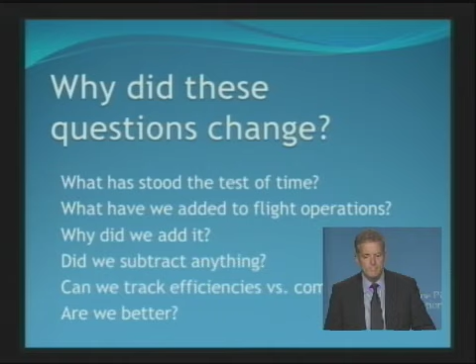Yeah, I think we subtracted something. I think we subtracted a thing in basic pilot skills. This Saturday I should go for my B-25 type rating, and that airplane, it takes 5 fingers to start the engines. But we don't want anybody to have to watch the color of the flame to adjust the mixture of an engine anymore. That's not a very good idea.

Very interesting question: can we track efficiencies versus complexities? We can always make things more complex, but would we actually make it any more efficient? Are we better? Are we better?

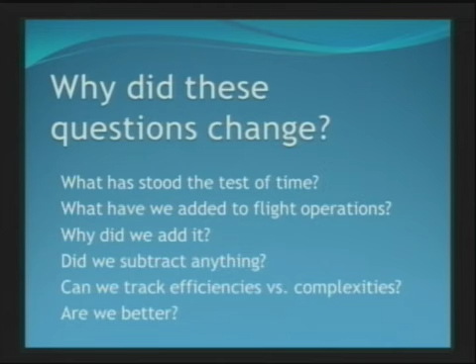When Alan was president of the Boeing company, he had a meeting with us - this is the original 20 people that made the 777 program. We're sitting around this meeting in his office, and he said your mission is to make a safe and efficient global air transportation system, to be a key participant in a safe and efficient global air transportation system. Our collective mission, from the designers to the controllers to the security people, the maintenance people, to the people that operate the airplane, has never changed.

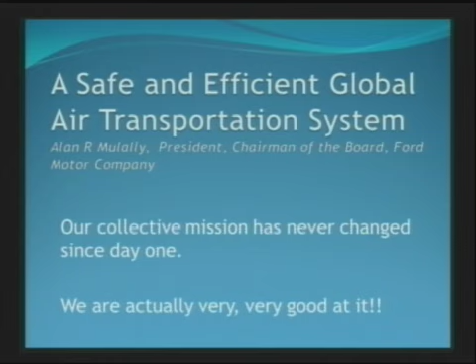It is absolutely, unequivocally about safety. If we ever lose the safety, the theory that we not have a safe flight, we're all out of business. Nobody will get on our jets, no matter how wonderful the coffee service is or the TSA is. And as Dave said it very eloquently, better than I can say, we're actually very, very good at it. I ran through the statistics of the predictions in 1990, and we are bettering the requirements of the safety event analysis of 1990, as the rates of flights go up. So we're actually better than what we hoped to do, right?

But we know we have to keep getting better because the future is out there. When Dave asked me about coming to talk about this, this was the first set of impressions I had.

He says, why don't you talk about the future of aviation and technology and what are you going to do? And I drew a big blank. But I kept thinking, airplane changes in the last 40 years. So anybody got 727 time? Maybe probably as flight engineers if you're still around anymore.

The 737 autopilot, autoflight had a heading hold, altitude hold, and VOR track. That was all it had. Flight director wasn't coupled to the autopilot. No auto throttle system, no manually tune all the frequencies, distributed caution and warning systems in the overhead panel, manual systems control. And then for your oral exam, you could legitimately draw the system on the chalkboard.

The 787, 777-300 auto-flight guidance. On the 787, from hitting the toga button on the takeoff roll to coming to stop at the end of the runway, we will provide you left-right guidance. Once you get airborne, we'll provide you up-down guidance. We'll provide you indication of deviation from the path, and warning of excessive deviation, from the toga push until the end of the rollout.

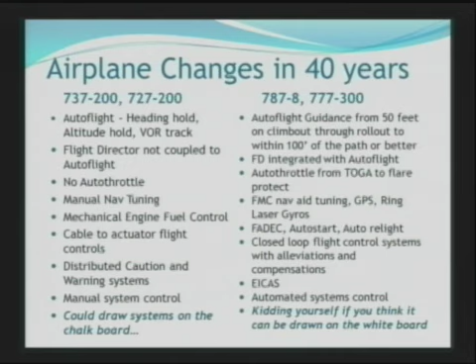Closed loop flight control systems with alleviations and compensations, my favorite part of it. EICAS systems, automated systems controls—if you ever looked inside a 787 or a 777 and you think what you drew on your oral was really in the airplane, you're dreaming. You're flat dreaming. And it goes into the concept that Dave spoke about earlier, the fact that we are systems. The airplane, the whole thing is a system. The people, the pilot, and the airplane make a system.

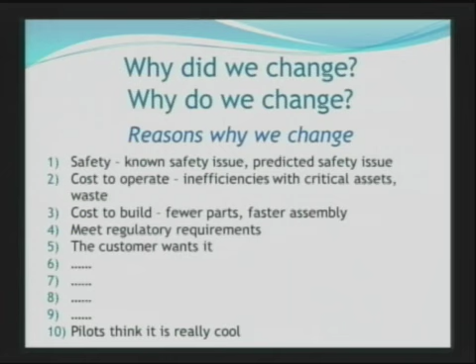Why do we change? Why do we change? Safety, right? Cost to operate, cost to build, meet regulatory requirements like the next gen. The customer wants it. There's probably four more in there, and then the last one—this is one I have to deal with all the time—the pilots think it's really cool. So all those people that want their iPad holders installed on the yoke, skip it.

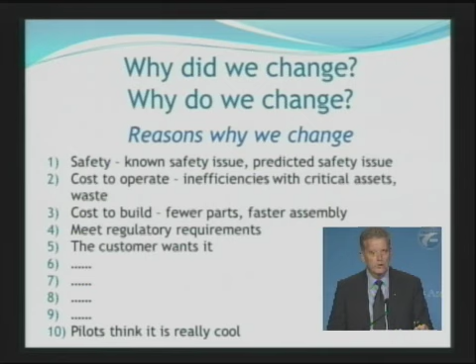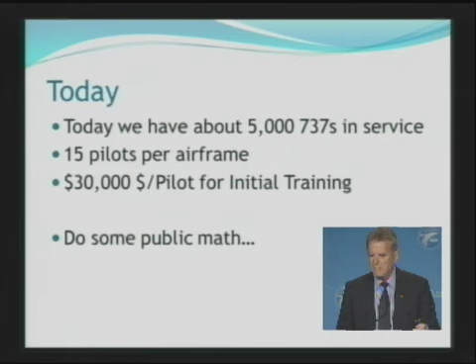We have embedded infrastructure. We have 5,000 737s in service, just the numbers. 15 pilots per airplane, $30,000 estimated cost for training. Do some public math: $2.25 billion in capital invested into flight crews around the world.

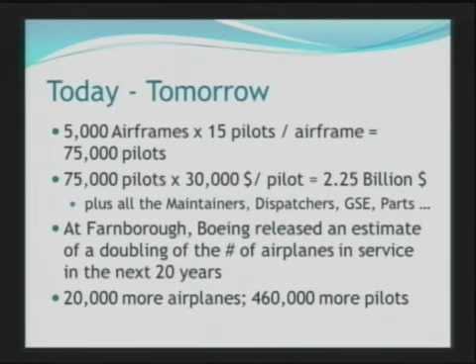At Farnborough, Boeing said that we think the airline service is going to require 460,000 more pilots in the next 20 years. As far as I can figure out, that exceeds the capacity of the training system today. So unless you know of a really killer application, the competitive race for us right now is to get 787s out the door, get 777s out the door, get the 737 MAX out the door, and get it into our customers' hands.

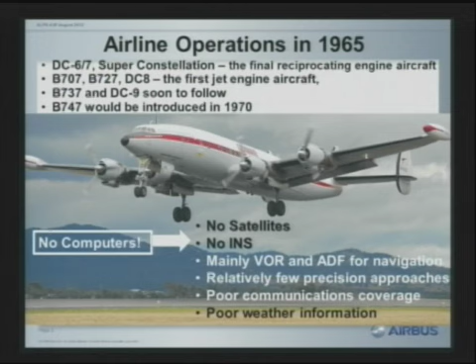The role of the pilot in 1965 was to aviate, navigate, and communicate, with the help of a flight engineer to manage the systems. The flying task was essentially an extensive manual skill set, and the mental skill set required was focused mainly on instrument flying.

It required of the pilot a solid knowledge of the atmosphere and weather, basic aerodynamics, and airfield capability. By airfield capability, I mean: on a given runway, at a given weight, can I get off this runway with the required performance, both from a climb standpoint and an accelerate-stop standpoint? And in the landing case, can I land on that runway given the weather conditions, the runway condition, the runway length, where I want to turn off, etc.

So those basic required skill sets - knowledge of the atmosphere and weather, basic aerodynamics, and airfield capability - are what the pilot really needed to know in 1965. Let's have a look today and see what skills are required.

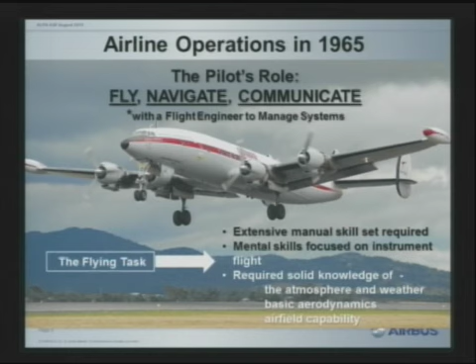Airline operations in 2012: the A320 and the 777 were the first fly-by-wire airplanes, and they've been in service now for almost 20 years. Almost all the airplanes flying today have glass cockpits with LCD displays, and routine overwater operations are now conducted with twin-engine airplanes.

We're beginning to see, with the introduction of the 787 and later the A350, primary structural elements being made of carbon fiber to save weight and increase performance.

Computers, lots of computers. We have GPS with GBAS and WAAS for augmentation, triple IRS, and FMGC to integrate everything so you can have extremely accurate navigation.

With augmented GPS, we can fly approaches to almost any airport with a runway long enough, down to Cat 1 minimums. For communications, one of the things that was lacking in those early days was long-range communication, but now VHF has a data mode, HF has a data mode, and SATCOM has a data mode. So with SATCOM and CPDLC, you have tremendous long-range communications.

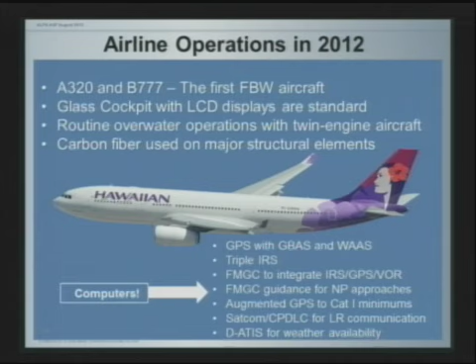In addition, we have a lot of weather products produced by satellites. The airplanes themselves can report weather conditions back to the ground stations. So you have excellent global weather capability today.

The pilot's role - how has it changed? It used to be aviate, navigate, communicate. The navigation and communication roles are now largely automated, but the pilot still has to do the basic aviating task. And a new task has been required of the pilot: to manage the overall mission.

Systems today have been largely automated. Those of you who wrenched on the 727 know you had a manual pressurization system, and you're very, very thankful that modern airplanes have automated pressurization systems.

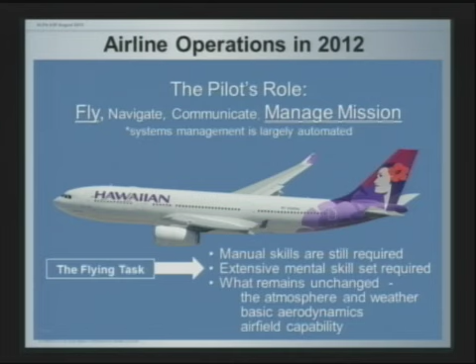But managing the mission means the pilot now has to really consider everything going on with his particular flight - once you're airborne, let the airplane do the navigation and a portion of the communications, but manage that flight to get it to the exact position you want, either in space on the approach, or on the runway at a specific time for your company, so the airplane can get to the gate, turn around with a new load of passengers, and be on to its next destination. If you look at the flying task in 2012, you realize there is still a manual skill set required.

But there is now a new skill set which is extensively mental that's also required. What remains unchanged? The atmosphere and the weather haven't changed, basic aerodynamics haven't changed, and airfield capabilities in terms of what you can do with that airplane on that runway have not changed.

I want to give you two examples of how technology has changed the pilot interface, and those examples are what's happening with flight controls and what's happening with engine controls.

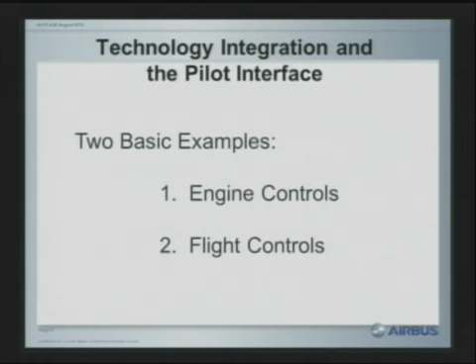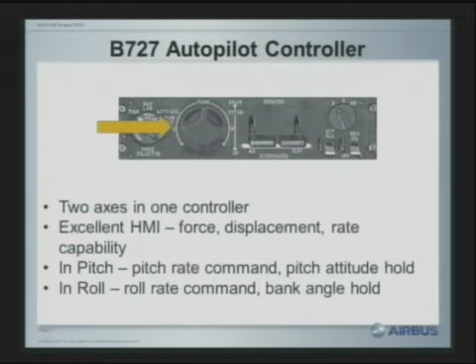If you look at the Boeing 727 autopilot controller, which is probably the best manual autopilot controller that I've ever flown, there were two axes in one controller. It fit your hand very nicely. It was located just behind the thrust levers, so you just had to move your hand over and use the autopilot to control the airplane. It had excellent HMI, force, displacement, and rate capability. In pitch, what you had is a pitch rate command, pitch attitude hold, and in roll, what you had was roll rate command and bank angle hold.

If you go and look at today's controllers in fly-by-wire airplanes, whether it be the side stick controller that we use in our airplane or the manual controller in the Boeing 787, you also have two axes in one controller. Excellent HMI for force, displacement, and rate capability. And in pitch, you find that it's basically a pitch rate command, pitch attitude hold, and in roll, a roll rate command and a bank angle hold.

So you can view the controllers in modern fly-by-wire airplanes as either super autopilot controllers, or you can view them as pilot controllers where the airplane itself is compensating for all of the undesirable motions - for the Dutch roll, for example, for the short period mode of motion, for phugoid, and to control the spiral - which will allow you to fly a very precise bank angle.

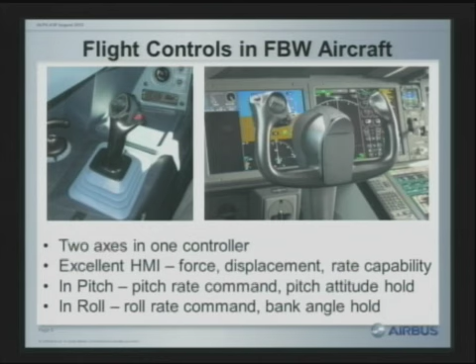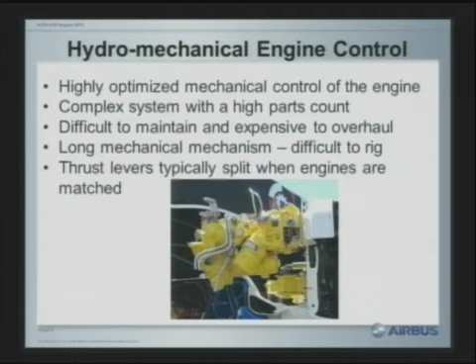Difficult to maintain, expensive to overhaul, has a very long mechanical mechanism from the cockpit out to the engine. And even when it's rigged to the best of the mechanics' abilities, there was usually a thrust lever split that you had to compensate for when you were flying the airplane. One last thing that's not on this slide is with the hydromechanical fuel control, you probably didn't have over temperature protection for the engine itself.

Now let's look at today's FADEC. You have excellent engine control without exceeding engine limits. You have an optimized controller that will actually extend the engine life, which is near and dear to the pilot, to make sure that those engines are going to run and run for a very long time.

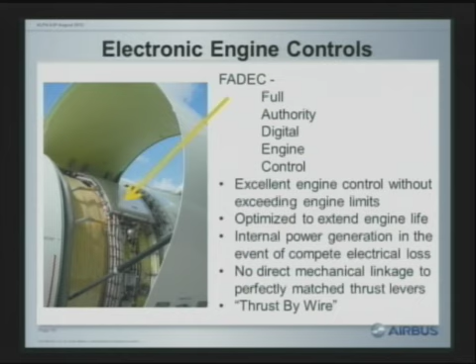It has an internal power generating capability within the engine itself, where there's a small alternator that will power just the FADEC in case the engine loses total electrical power from its normal generator source or from the airplane itself. But I think what's key is that there is no longer any direct mechanical linkage, so that you can have perfectly matched thrust levers - you might call it a thrust-by-wire system.

So when you think about these technology changes and how they've affected the pilot, you may not have ever thought about it that way, but as technology changes the pilot's role in how he interfaces with the airplane, is the traditional knowledge base of the pilot being overlooked? What about the weather? What about basic aerodynamics? What about the runway environment? Are we overlooking all of that knowledge set that the pilot needs in the process of improving technology in the pilot's role?

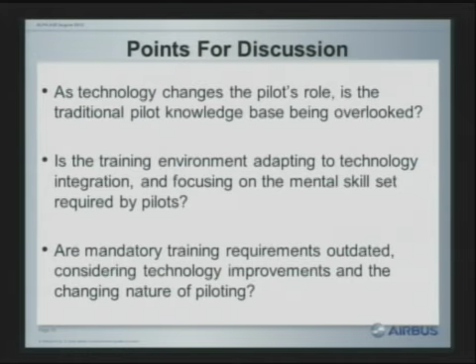Is the training environment adapting to technology integration and focusing on that extensive mental skill set that the pilot needs in today's airline operation? And finally, as a thought provoker, are mandatory training requirements outdated considering the technology improvements and the changing nature of piloting? We can have an airplane today where you can take off at maximum gross weight, have an engine failure, and continue to rotate and take off, and the airplane will stay wings level, maintain its heading, allow you to climb out and operate your normal procedures after that. It's not the same as the airplanes that we flew in 1965. Does training need to adapt to those new technology improvements?

Now, the opportunity here is there's new advances in science. The complexity sciences study how adaptive systems work, how people in various roles learn, recognize, anticipate. In our world, we talk about it as proactive safety. But there are new findings, new concepts, new laws about how human systems adapt in the face of complexity. Now, intellectually, this is very non-intuitive.

You're used to simplifications to make things work. You focus on one piece at a time, one issue at a time, then try to make the interactions work. From a complexity point of view, the system is all in the interactions and what emerges. It's all about more and more extensive interdependencies. Notice how automation creates a layer of apparent simplicity over those increasing interdependent relationships between more and more parts, so that everything looks simple and runs super smooth until it doesn't, just like Yogi Berra reminded us.

And then we see cascades you have to try to keep up with. We see tipping points, we see surprises. We have to integrate across multiple perspectives, and we have to not simply find a good operating point, but be able to maneuver as organizations, as learning organizations, in the same way you have to control the capability for maneuver in the aircraft.

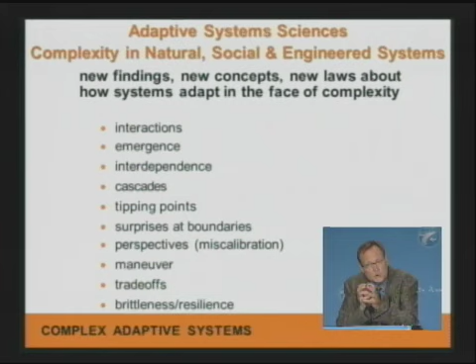In the face of this, the critical concept is when systems fail, they reveal points of brittleness, and they reveal hidden sources of resilience. People are often the hidden source of resilience in one or another role. Sometimes we restrict the ability of people to act as a source of resilience in one role, and we need to make up for that in other places.

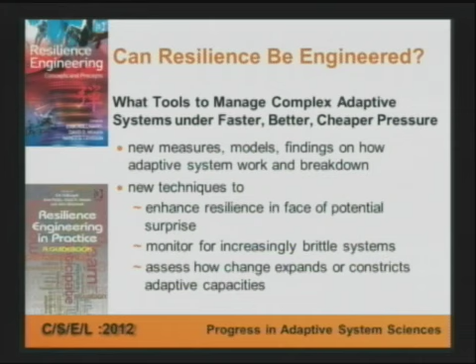The question is, can resilience be engineered into organizations that carry out complex activities? Can we measure and monitor for increasing brittleness and act proactively, especially as we're making changes to be faster, better, cheaper? Well, for me, resilience started with NASA's history.

We just had a great landing on Mars, but you may remember in 1999 we had 3 failures. NASA started a project called Design for Safety. The diagnosis from the 2000 accident report was increasingly brittle systems under faster, better, cheaper pressure. Now, a variety of things happened, and then we had a repeat in the Columbia accident where I was able to be an advisor to the investigation board.

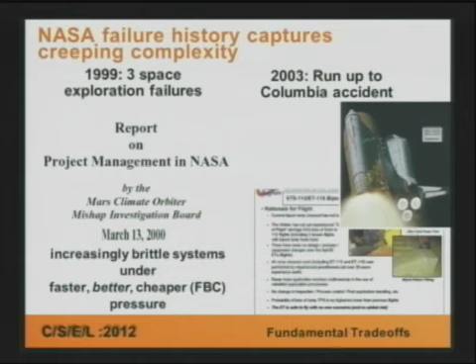This is a slightly edited for visibility slide from 2000. I want you to think about and remember what we just covered, and how it applies to you today. NASA exists in a changing environment with new performance demands and resource pressures, driving down costs, shorter, more aggressive schedules, new partners and relationships, new roles, skill erosion, heightened public interest.

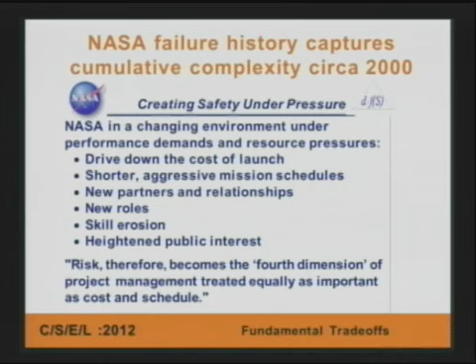The question they posed was what could be a new dimension that could be used in management as important as cost and schedule. And the proposal I made in 2000, and in the aftermath of the Columbia accident here in DC to NASA and to Congress, is that resilience - and that we have started this development of resilience engineering.

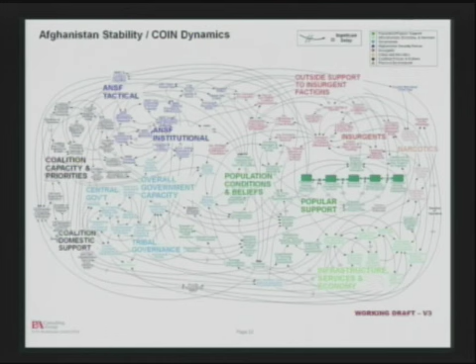So operating in seas of complexity, while intellectually non-intuitive, is something you experience how to do every day. As a key adaptive element, a source of resilience in the aviation system, you have to deal with hidden and dynamic interdependencies. You have to handle challenges when non-routine and unexpected conditions arise. You have to be able to keep up with a cascade of events, like when a sensor failure cascades and you don't know what to trust in terms of cockpit indications.

What we're trying to do is understand and measure how systems are brittle and how we can bring extra adaptive capacity to bear. The concept is actually from you that we're using to teach other people how to do this. We can take the concrete example of flight control systems and say, in order to maintain control for the future, for the next event that might occur, you have to maintain a margin of maneuver, a control margin that you can act with to compensate for unexpected or non-routine events.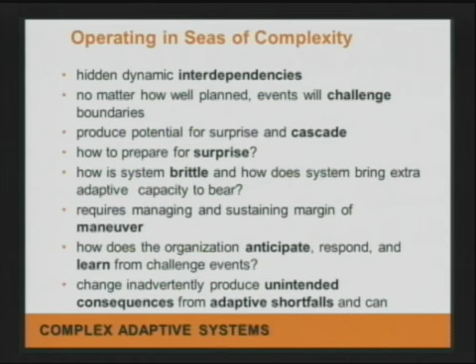Now, what we see over time is cumulative, creeping, inadvertent complexity. The unintended consequences are increasingly brittle systems, so that our failures are not due to a component or even several components failing, as is still typical in how we try to learn from incidents, trying to improve individual pieces of the system. As a complex adaptive system, we have to see it's in the interactions, and therefore how the incident or accident tells us about brittleness and sources of resilience. Otherwise, we will continue to see surprising failures and continue to play whack-an-incident in trying to react and keep up when our intent is to be proactive.

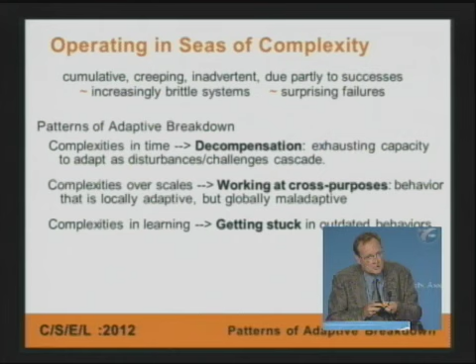Now, there are regularities about how complex adaptive systems fail. We don't have time to run through them right now, but you are well prepared to deal with these most of the time because of your skills as effective pilots.

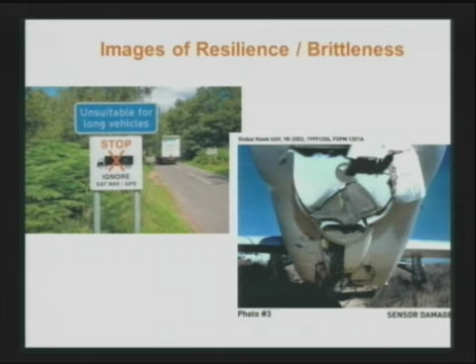When we think about resilience and brittleness, the best thing is to think of images you encounter, whether it's a UAV accident, a friendly fire incident with the Patriot missile, or more humorous cases where the introduction of GPS in England has led to new signage warning people not to follow their satellite navigation, because large trucks, lorries, tend not to be able to go through small lanes in English villages.

We just finished this week, and I believe it's being released, if not today, in the next couple days, a report on autonomy for the DoD as part of the Defense Science Board. In this report, we run through many of the different issues in how to deal with resilience and brittleness, and the major shortfall that undermines the potential benefits of more autonomous, more automated systems is the inability to take a true systems perspective. We focus too much on individual platform capabilities, subsystem capabilities.

What we need to do is look at it as an integrated system of people and computers managing potentially escalating and cascading situations. What's also interesting in the report is how we point out that you don't have to be pessimistic in the face of complexity.

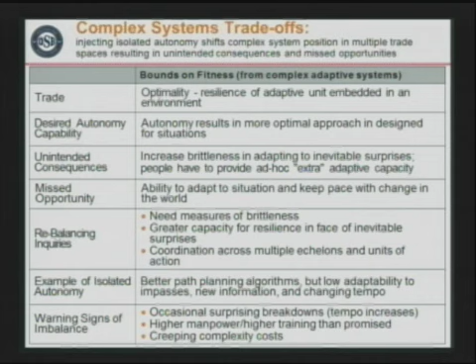There are ways we can anticipate, just like you anticipate problems and prepare for them as you run safe flights. You do that in terms of alternate destinations, understanding fuel margins, understanding small changes that require your vigilance in the situation. In the same way, as a larger system, we can anticipate bottlenecks ahead and look for unintended consequences. Complexity science and resilience engineering are building new ways to do this, including new measures to assess how brittle the system is as part of introducing new technology.

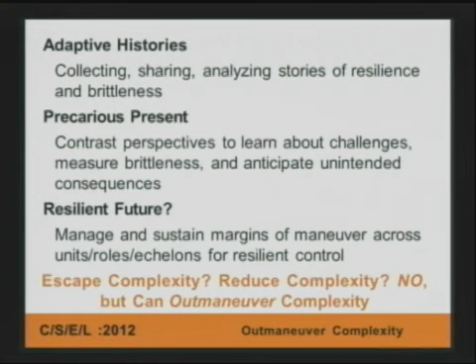So what's the simple summary of a complex adaptive system resilience approach? You've gotten good because you've adapted. People in a variety of roles have anticipated and learned, sometimes through bitter experience. The difference is, when you look at those cases, or when you analyze new cases, we need to start seeing them as stories that reveal brittleness and hidden sources of resilience.

When we comment on de-skilling of pilots, we are addressing a loss of a traditional source of resilience. When we have new ways that a single small failure propagates and influences multiple systems, because of the interdependency created by multiple automated subsystems, we're increasing the challenges, increasing the potential for cascade, increasing the difficulty of responding effectively under time pressure.

When we look at today, despite the success, not just despite the success, but because we are so successful in balancing efficiency and safety, the Yogi Berraism captures it for us. Even as we get better, the fundamental system trade-offs that was on that slide from the Defense Science Board report indicates that we introduce new points of brittleness, new complexities people have to deal with. The present is more precarious than we think. It's a common finding from all approaches to safety, from an organizational perspective, that safe organizations are constantly on edge, recognizing that past success is no guarantee of future ultra-high safety performance.

How do we create a resilient future? It requires new partnerships, integrating multiple perspectives at different levels and echelons across the industry. It deals with future cases, whether it's next gen, introducing remotely piloted vehicles into the domestic airspace, or dealing with new ways to improve cockpit information. Creating a resilient future is going to require new working relationships and new partnerships.

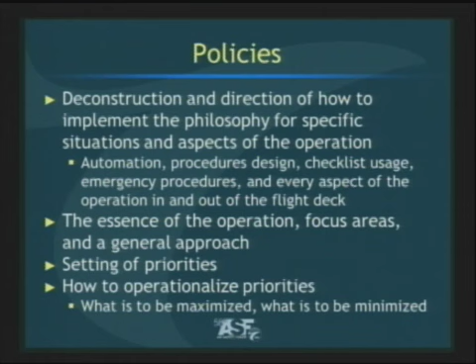Let's skip through that. So here's some of my thoughts for effective automation policy. And we need to be more explicit than we have been. Traditionally, over the past 20 years, we've seen use of the maximum automation available as necessary for your phase of flight. That's no longer sufficient.

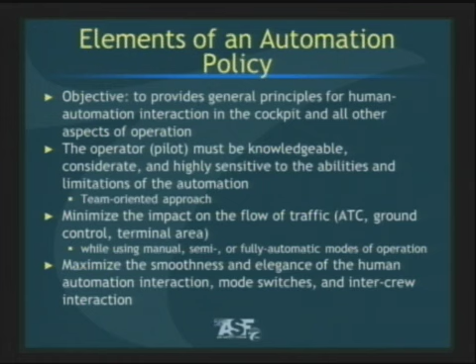So here are some of my thoughts, excerpts from a paper I'm working on with a colleague of mine. The operator has to be knowledgeable, considerate, and highly sensitive to the limitations of the automation. Also minimize the impact on the flow of traffic, and maximize the smoothness and elegance of the human automation interaction, mode switching, and inter-crew interaction. I believe both Mike and Dave sort of hit on some of these high points as well.

So moving forward, to maintain a linear and consistent process, policies direct the development of procedures, and this provides overall internal coherency. As such, it provides a method for executing the prescribed tasks, and this group knows all about procedures.

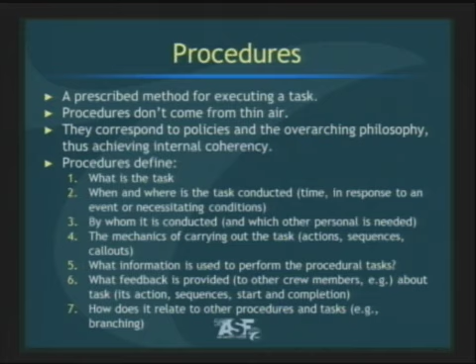And realistically, we can write the best philosophy and policies and procedures, but how does it hold up in reality? That's the true test of reality, and we see that in our work all the time.

So, last of the 4 Ps is practices, and it's what we do every day. It's every activity we perform on the flight deck, and ideally should conform to procedures and policies.

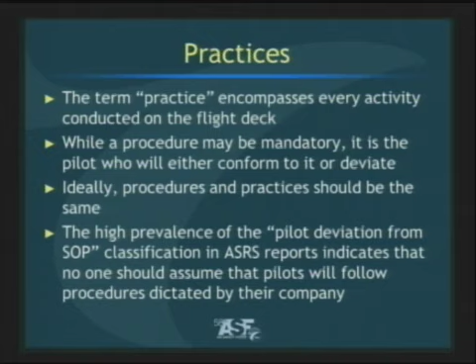Sometimes there's no established procedure for a situation, but as long as you have policy guidance, the expectation is very clear. You may even find a situation where there's no policy guidance, but as long as there's a clearly defined and articulated philosophy, the pilot has a general understanding of expectations.

Unfortunately, we can find ourselves in situations where there is no overarching philosophy. This is truly problematic for the pilot and the organization. Now you're in uncharted territory. Nobody wants to be there, and it's not expected in normal operations.

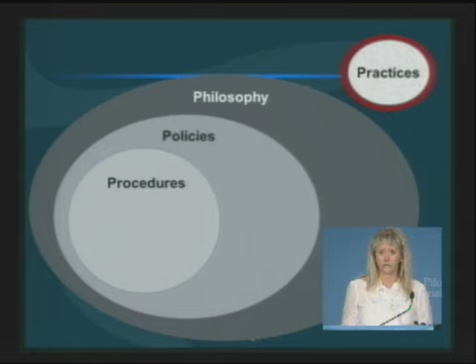Perhaps the aircraft is doing something unexpected that we have no mental model for. Think Air France 447 or Colgan 3407. The complexity of component interactions can truly lead to some unanticipated systems behavior, as Dr. Woods was just saying as well. I had some thoughts for some other examples of the same kind of thing.

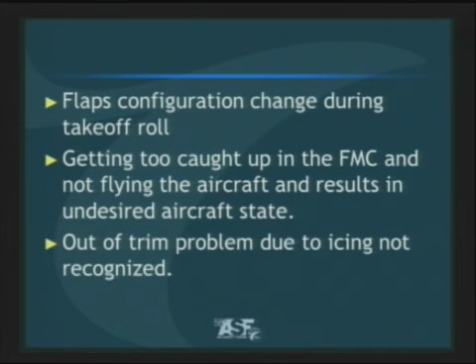Not exactly SMS ideal. In any case, procedures and policies were written and designed, they were tested in the sim, but how did it hold up in practice? How did it correspond to reality? That's the essential feedback loop, and we need that. We know procedures are never 100% perfect, but it's important to get the feedback to do the modifications.

So what can we do with respect to automation? First and foremost, consider the manufacturer's policies and philosophies of automation. They have a design philosophy, and that needs to be where we start. Then we need to work within our own organizations to fix the disconnects. Heading into next gen, that's more important than ever.

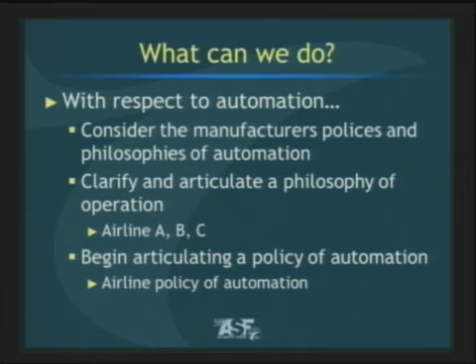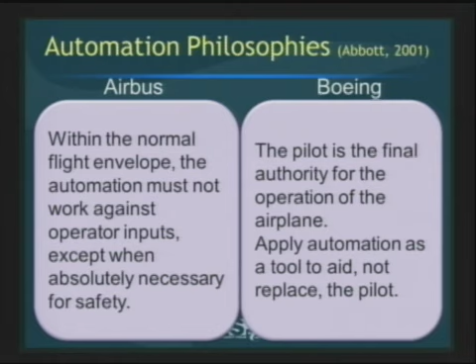Only after we look at their philosophy and our own philosophy can we move towards specific policy and flight path management. Just some looks at different philosophies of our manufacturers. It's very important to know the environment you're working in and to start with that. That should be the foundation.

I know, a little bit of an eye chart. I wanted to expand on some of the parts of it. And I know Boeing has evolved a bit with the 787 from that, and we thank them for it.

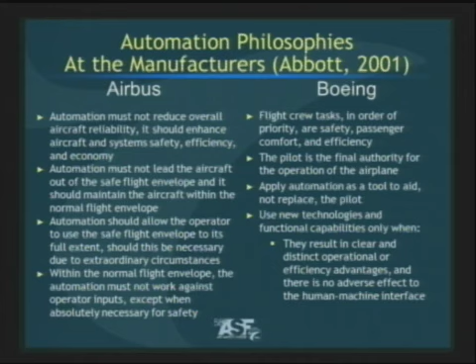So the airlines need a much more salient automation philosophy or flight path management policy. Manufacturers' automation philosophy is about design, and it doesn't talk about the operation, and it provides little guidance for training, procedures, division of labor, workload management. And many of us operate both Airbus and Boeing on property, and others as well. So it's really important to go back to the foundation before we jump in to create new procedures.

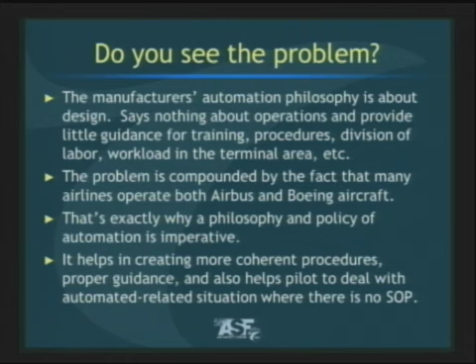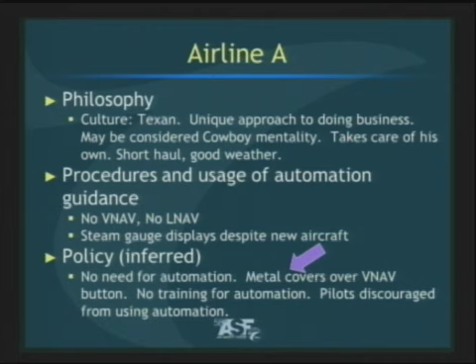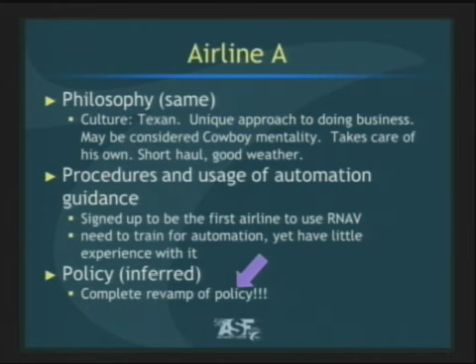I have a couple of examples to illustrate some of my points. So Airline A, if you want to read it, there's the philosophy. Basically, this is how they operated for 30 years. Their philosophy and procedural automation guidance was pretty clear: don't do it. Then they realized potential savings in both time and fuel in using automation effectively, and the whole airline policy had to be rewritten. It wasn't just about rewriting some procedures, it was an entire paradigm shift in their philosophy and their culture. It was a significant change. So be cautious in just changing the order or flow of things. You need to actually back it up and support it with policy so the expectations for the pilot are clear.

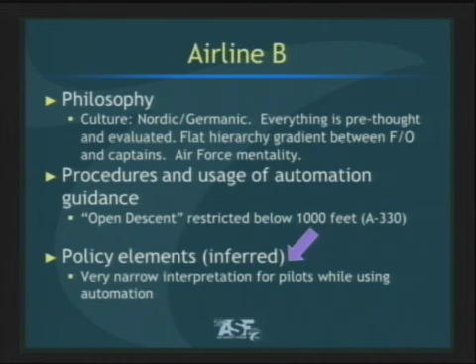Another example: we have Airline B, and some aspects of their philosophy, their more rigid culture, required open descent restricted below 1,000 feet on the A330, directly related to their culture. Then we have Airline C, with a much more flexible culture, and they only restrict their open descent at 500 feet on the A330. So two airlines operating the same aircraft with significantly different philosophical differences in their automation policy.

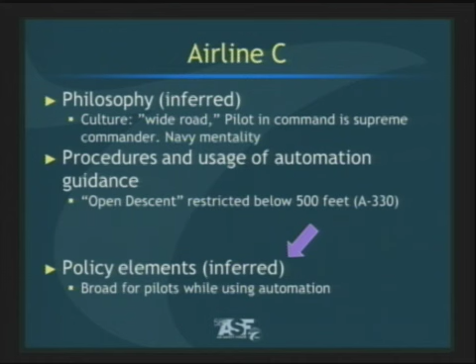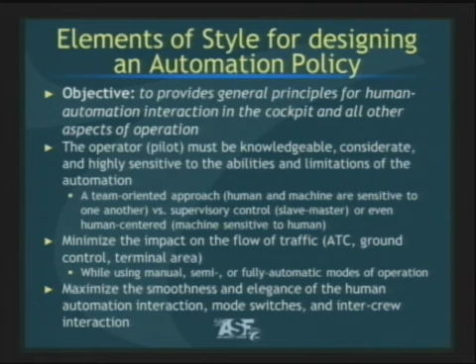And we need to consider the role of the automation in the overall system. We've been seeing way too many automation surprise and startle issues in recent years. We need to reverse that trend, and it's time to do that at the threshold of next gen. It's an opportunity. Thank you very much.